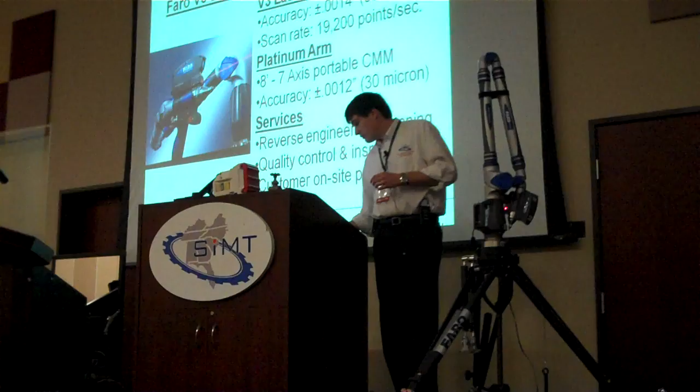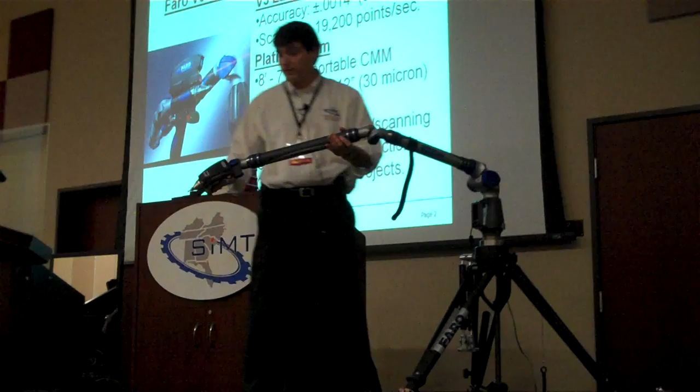So, the equipment I have here is FARO's, not their latest arm, it's one rep below their arm. It's an 8-foot working area arm. And so it's a 7-axis portable CMM. We got a touch probe here. And then on top we have a laser scanner. Okay? So we really have two systems in one with this.

The laser scanner is FARO's new scanner. Their latest one is called ScanArm V3 laser scanner. The accuracy of this scanner is 35 microns, so right under 2 thousandths. The accuracy of the touch probe here is 30 microns, so it's pretty accurate as well. And as you can see, we can get in all kinds of tight areas because we got 7 axes to move around and do all kinds of various intricate parts and jobs.

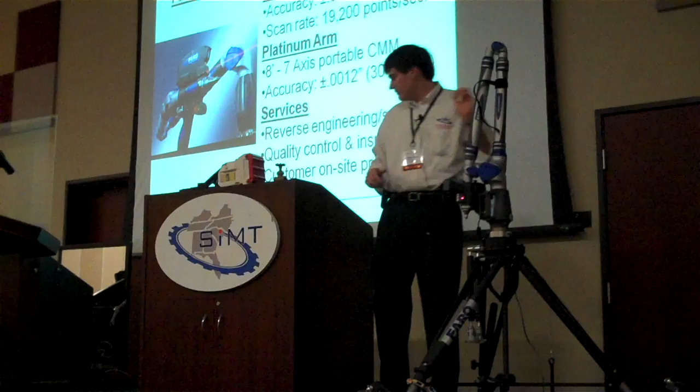One of the first projects we did after receiving this was a part for ABB, and this is a part here. And this is used for high voltage applications. And actually, the white piece you see here is two SLS parts, mirrored copies of each other. The story behind this is ABB came to us and said, hey, we're having some issues with the part, the way it's being manufactured now.

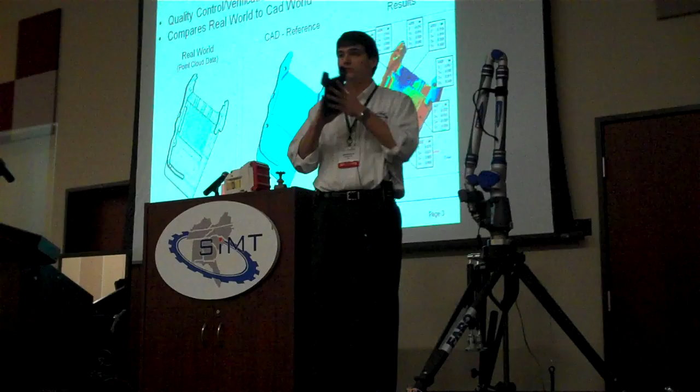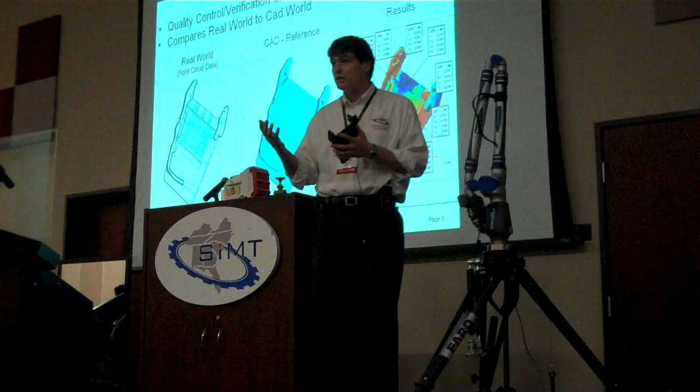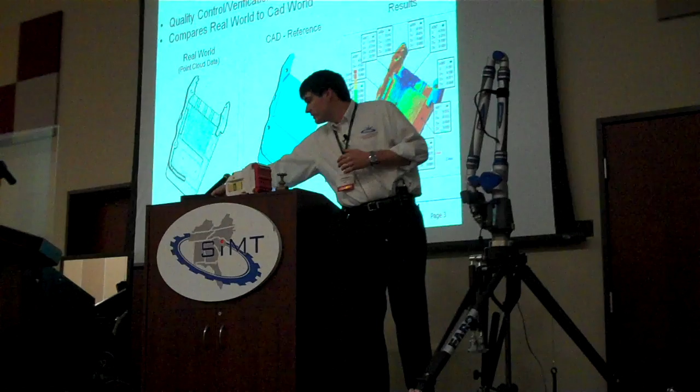They're having to do some post-processing work, some milling and that kind of thing on this part, and we're just not getting the kind of results we want. So can you scan it, make us a CAD model so we can take it to look at a different process without having the post-processing work on it? And we said, yes, sure, we can. And they also wanted to look at some different variations on it for quality control. So they wanted to scan this, reverse engineer, and they wanted to, like I was telling you earlier, use the qualify process to look at the different variations between the CAD model and the real world part.

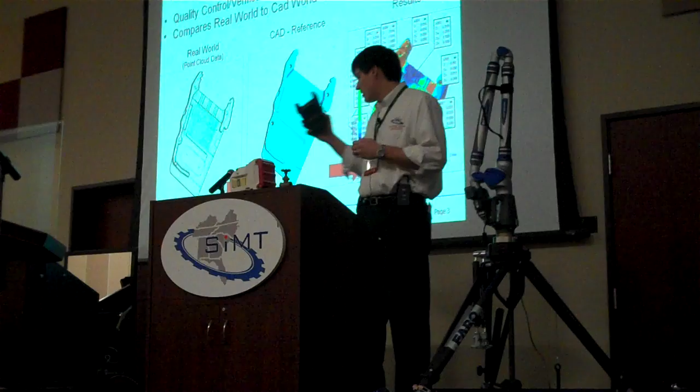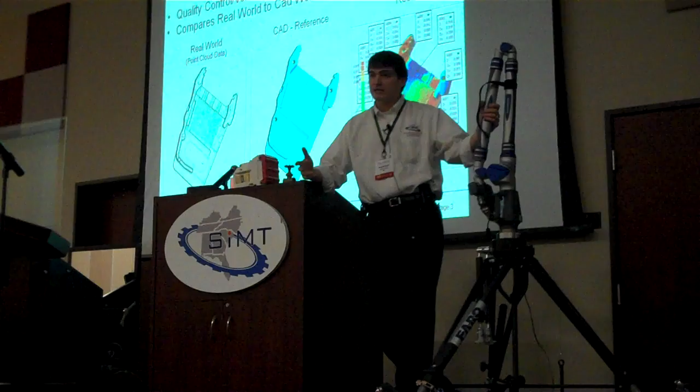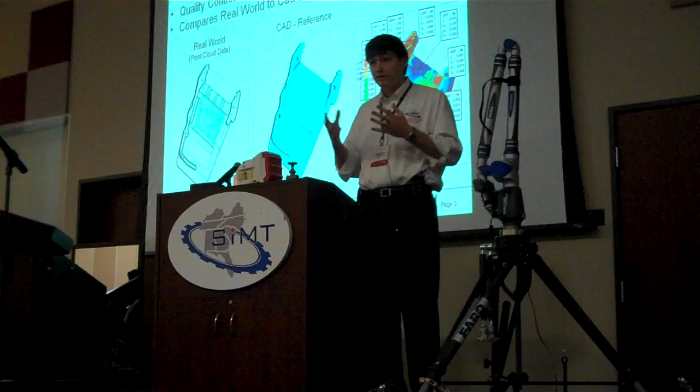As you can see up here, the first part on my right is the greenish part, and that's actually point cloud data. The way this works is you scan the part, and it takes about 19,200 points per second, and you create what we call point cloud data of the part. And then we take that point cloud data and we wrap it with polygons. So we triangulate it, and we make the second model that you see, the blue. Well, this is qualifying, sorry. So we have point cloud data. I'm getting ahead of myself here.

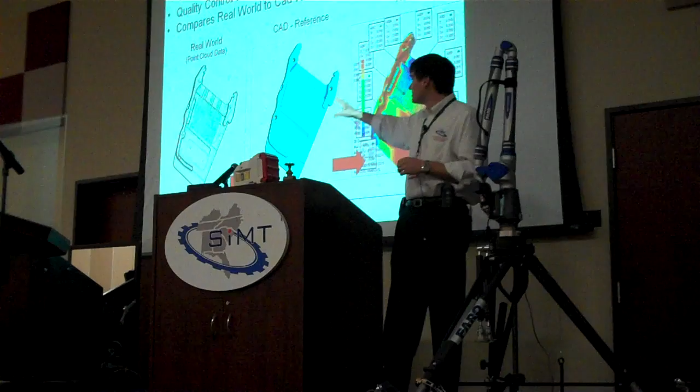And then we have the CAD reference. And we take that point cloud data, we overlay it on the CAD part, and we have the real world part. And then we get this, as you see here, this is qualifying. What this is is a color spectrum analysis of where the part is in spec and out of spec. The red areas and the dark blue areas obviously are out of spec. The green areas are within spec. So you can see this part is pretty out of spec. And it verified the results they were getting with the part after it had some post-processing work done to it.

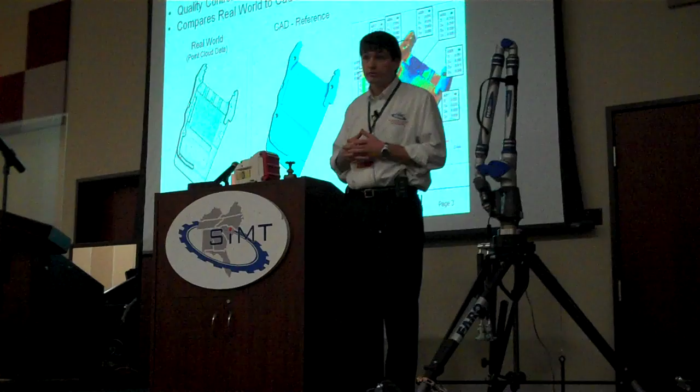The second capability of this is reverse engineering. We use the software. The software package is called Geomagic, and the qualification is Geomagic Qualify. The reverse engineering portion of it is Geomagic Studio.

And what we can do is we can scan it, scan this as you see up here, create point cloud data again, which is the green part. The middle part is the polygon part, where we wrap it with polygons and triangles, and we do some surface cleanup work on it. And then the last part that you see, the goldish color part here, is the actual CAD model.

Now in the middle stage, we can make it a solid volume part and actually export it as STL. So then we can take it straight into additive manufacturing technology. Or, in the last one, we can make a CAD part, an IGES or a STEP file that you guys can take and put into your CAD system and make changes or whatever you need to make to it.

I'm going to show you guys a real quick demo of how this works. Is anybody here familiar with this process already? Has anybody seen it before? Okay, so we got a few people here familiar with it.

There's several different scanners out there. There's one called a Handy Scan. It's a little more portable than this one. It's more of a handheld with, I think, a 30 or 35-foot cord on it, so you got a pretty large envelope of working. This is a little more accurate than the Handy Scan one. Handy Scan is used for scanning car bodies and car doors and that kind of thing. This is more for part applications, very tight tolerance parts.

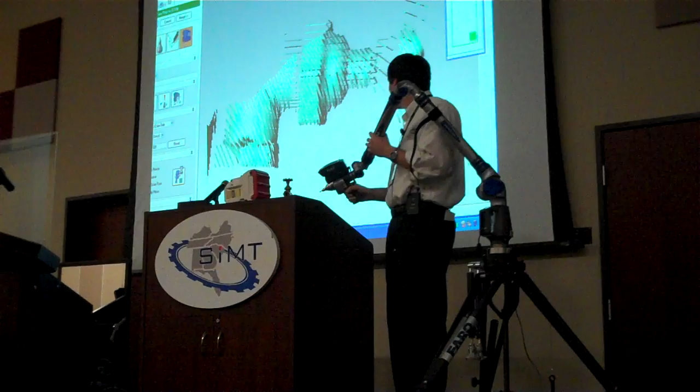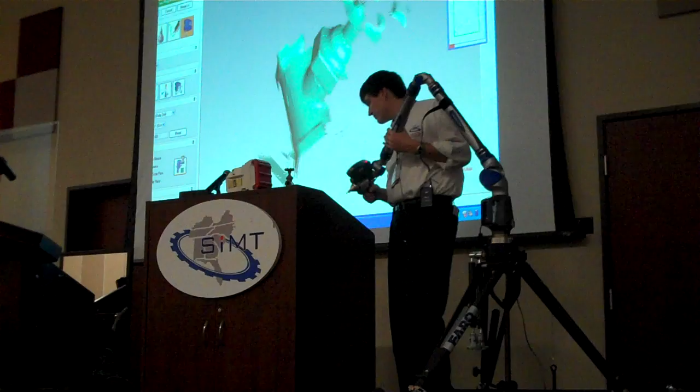But as you can see here, when I press the button and start scanning, you'll see some point cloud data showing up. And that's part of the valve here. It's a little difficult up here because we do have movement on the stage and not sitting on a very stable surface, but you get the idea. So, there you go. That quick, you get a portion of the part.

The other thing we're talking about, part verification, is qualifying and being able to pull different annotation points on your part. You can actually take the part that we make for you for scanning and overlaying on your CAD model, and you can actually download a free software and take a look at it yourself and pull different points you want.

Sorry about this, fellas. We got several different. Well, there it is.

So here you go. Here is the color spectrum analysis on the part-for-part verification. And as you can see, as I pull parts here, it gives me different data points, comparing the CAD model to the real-world part model. And of course, the reverse engineering using Geomagic.

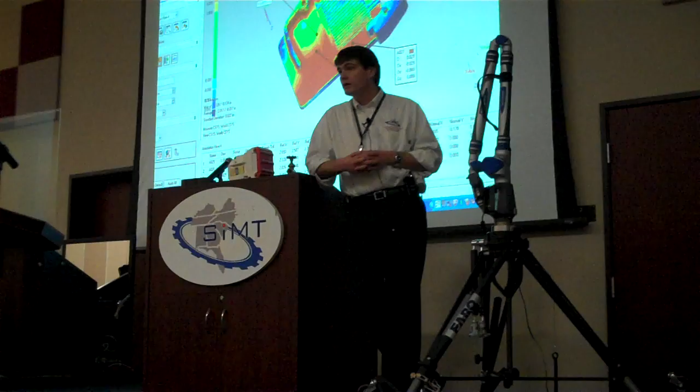And that's really the gist of it, the basics of it. I mean, it does get a lot more involved, especially when you're doing reverse engineering and having to do cleanup work on your CAD files and your polygon models and that kind of thing. But that is the gist of how this process works. Any questions? Yes?

Scale limitation. Well, you got an 8-foot working area with this one. But what we can do is we can scan certain portions within the area we are, and then we can move it, scan next portions, move it, and keep on scanning until you get the complete part scanned, and then you can merge them back together using the software. But in a static position where you are, you got about an 8-foot working area.

Any other questions? Yes? It would be very difficult with this arm. What you would use for that is a Handy scanner. It's a handheld scanner, and it's got three, looks like little eyes on it, one in the middle and then one down at the bottom of the handle. And where's Bill Watson? Bill back there with Anvil? He has a handy scanner, and he does a lot of big car bodies and scanning cars and that kind of thing.

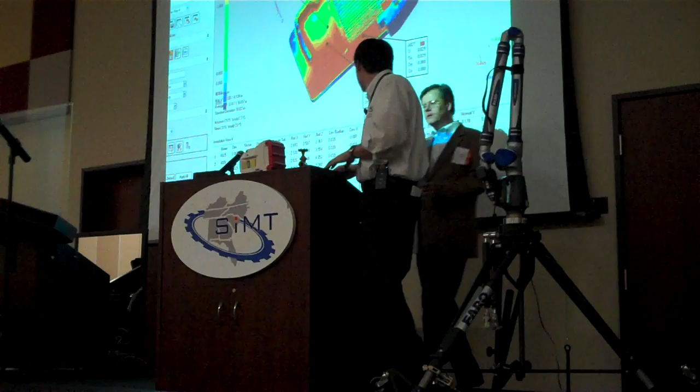Any other questions? I'll tell you what. I know that was sort of quick. No, that's okay. While you continue to take a few questions, can we go ahead and swap out the? So, continue with some questions you might have.